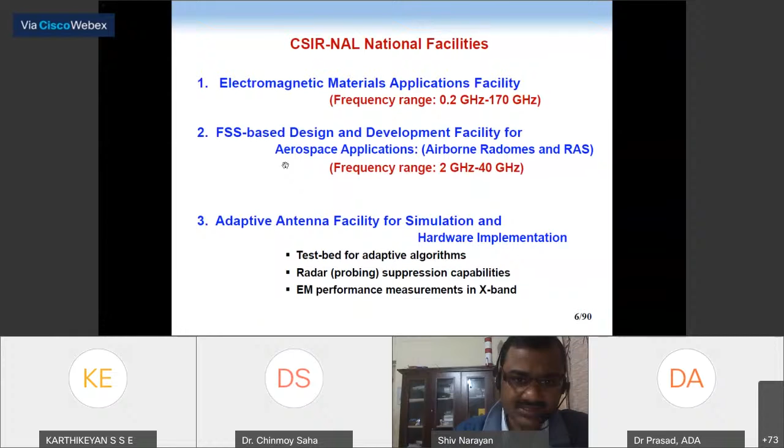Electromagnetic material application facility we have from 0.2 gigahertz to 170 gigahertz. FSS based design and development facility we have from 2 to 40 gigahertz, and adaptive antenna facility.

Till now we have developed several radomes, designed and developed at NAL for national requirements. For example, we have designed, developed and certified the Jaguar variable thickness radome. That TOT was transferred to HAL in 2008.

And certified radome, Saras nose cone radome, that was certified in 2000. This was developed for the NAL Saras aircraft. Multi-octave radome TOT was transferred to Indian Navy.

Apart from airborne radome, we developed several Doppler weather radomes. Like for ISRO, we have developed one close to 20-meter diameter. And also we have developed some ceramic radomes.

These are all our sponsors whom we support for design and development, like Boeing USA, DRDO, CAPS, ADA. These are our sponsors for whom we do the work.

Now we'll come to the topic of frequency selective surfaces. The origin of FSS started with periodic structures due to the great potential of military application. The oldest patent concerning periodic surfaces was issued in 1919 to Marconi and Franklin.

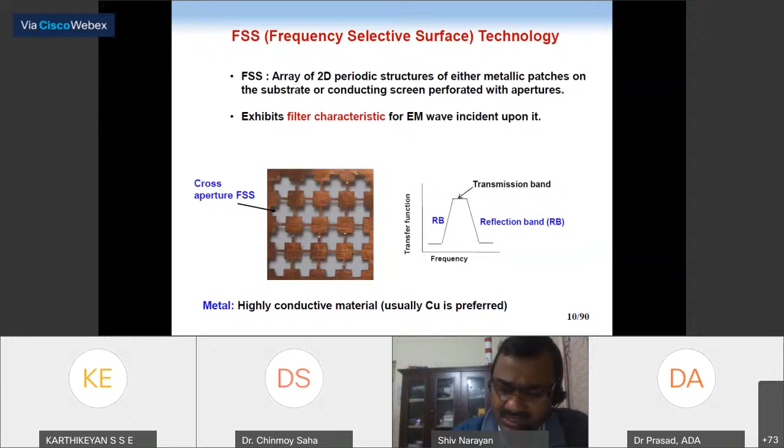In this case, we generally prefer copper for the metallic screen, because copper is easily available and its melting point is very high, so we can use it for aerospace applications. The types of FSS can be divided into two types based on element geometry.

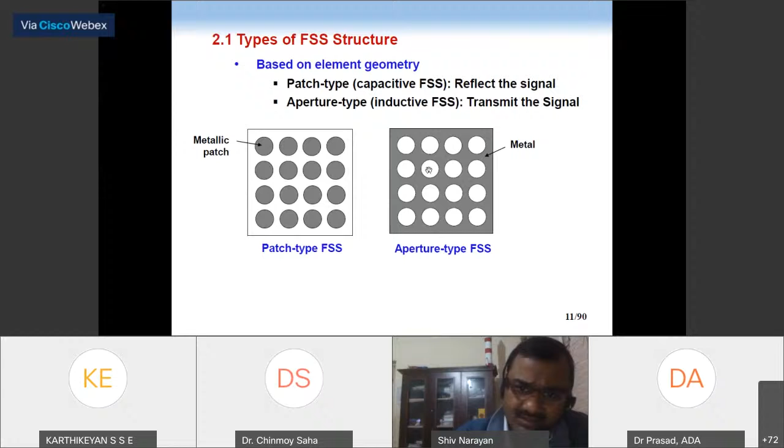There are two element geometry types: patch type, where the metallic patch is printed in 2 dimensions with periodic configuration, which basically reflects the signal whenever signal is incident upon it. The aperture type inductive FSS transmits the signal, allowing the wave to pass across it.

There are 4 kinds of FSS characteristics: low pass, which is a patch type FSS; high pass, which is square aperture kind; band stop, like patch type single square loop; and aperture type square loop showing band pass characteristics. So based on frequency characteristics, we can say there are 4 types of FSS structures.

Standard FSS structures available in the literature include the single square loop, which shows band reject characteristics at the design frequency, like 10 gigahertz. The double square loop structure is made up of 2 single square loops, so the inner one resonates at higher frequency and the outer one resonates at lower frequency. They combine and show band pass characteristics associated with two band reject filter characteristics at the design frequency.

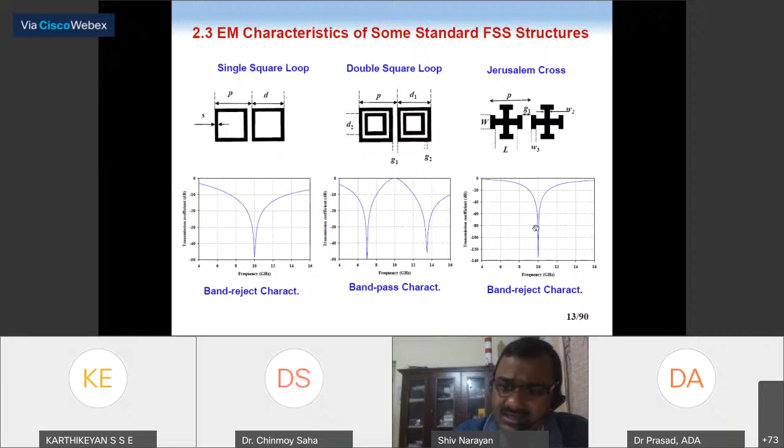We can design the FSS into three different configurations. First, a free standing FSS where there is no dielectric support, considered like suspended in the air. If you want to realize this, we have to make the support using foam, PU foam, and similar structures. Second, single layer FSS, where the FSS is backed by the dielectric, these structures are associated with the FSS structures on the other side.

And the cascaded FSS structure, this is made of more FSS layers separated by the dielectric spacer. Basically, this is used to enhance the bandwidth of the FSS structures. So these are all the design configurations of the FSS, how to design. This design depends on our requirement, whether we want high bandwidth or low bandwidth.

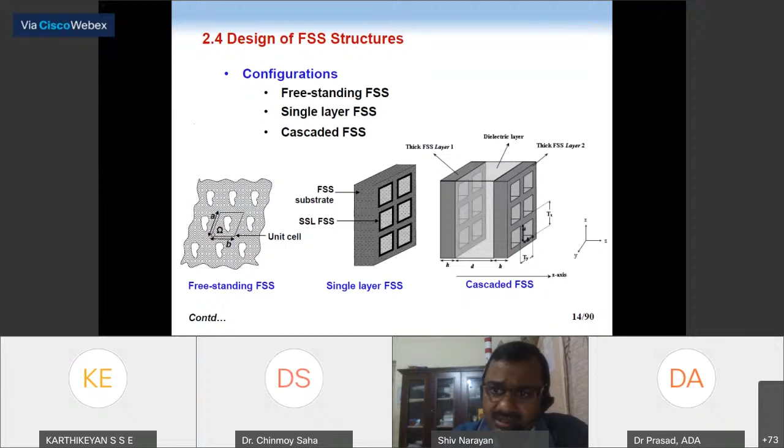It depends on that. So there are several methods for the design analysis of FSS structures. During the 1970s and 1980s, conventional methods were used like equivalent circuit model, transmission line, and transfer matrix method. These methods give very good insight into the physical problem, are easy to implement, and take less time to get the result. The only drawback is whenever we go for arbitrary kind of shapes, it is difficult to analyze with the equivalent circuit model, because it is difficult to produce the equivalent circuit model for arbitrary kind of structures.

To solve such kind of problem, the full wave method is more suitable because it can calculate the current distribution. So it is easy to calculate the field across arbitrary kind of shapes, and the only drawback is whenever we solve a large problem, it takes more memory and time. In that case, the approximate method is more suitable, like high frequency methods such as geometrical optics, physical optics, GTD and UTD. So these approximate methods we call high frequency methods.

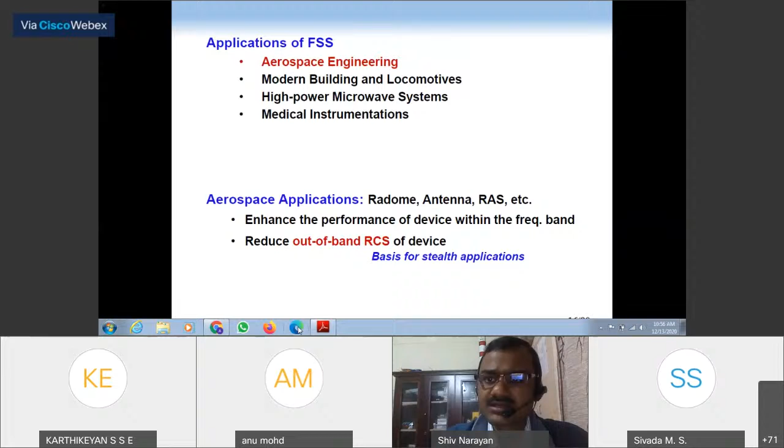So we were discussing aerospace applications. FSS has several applications in aerospace like radomes, antennas, and RAS. The main reason we use FSS for these applications is that it enhances the performance of the device within the frequency band and also reduces the out-of-band RCS of the device. That is the basis for the stealth application of FSS. Nowadays FSS is becoming more popular because of the stealth technology trend going on worldwide.

Now we'll go first to FSS for Radome. So basically, the Radome can be characterized...

Are you speaking in Telugu with Dr. Prasad? Yes sir, Krushna Kanth, sometimes Telugu sir, yes sir, we are talking. So where are you from, native place? I'm from Andhra sir, Kadapa. Oh Kadapa, wow, you have to be careful. No sir, nothing, we are very polite - stealth technology. Right, thank you sir.

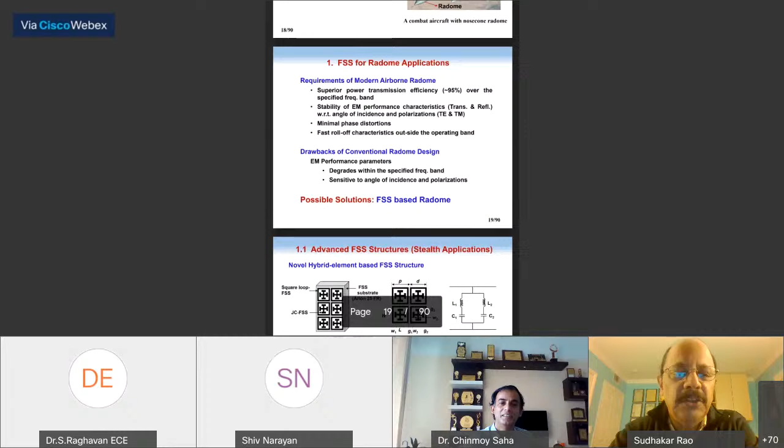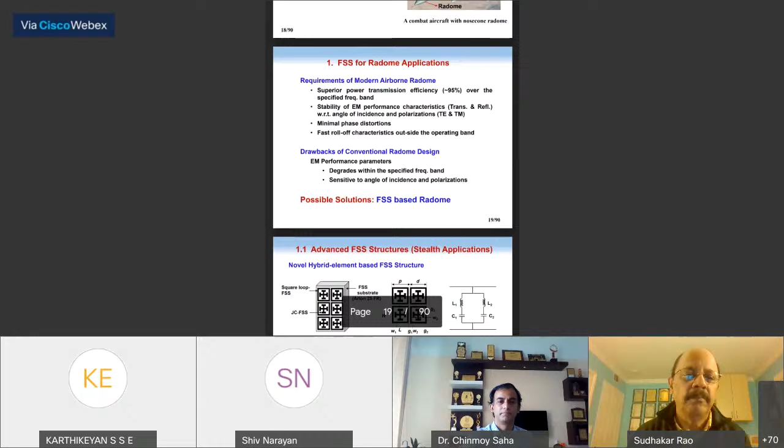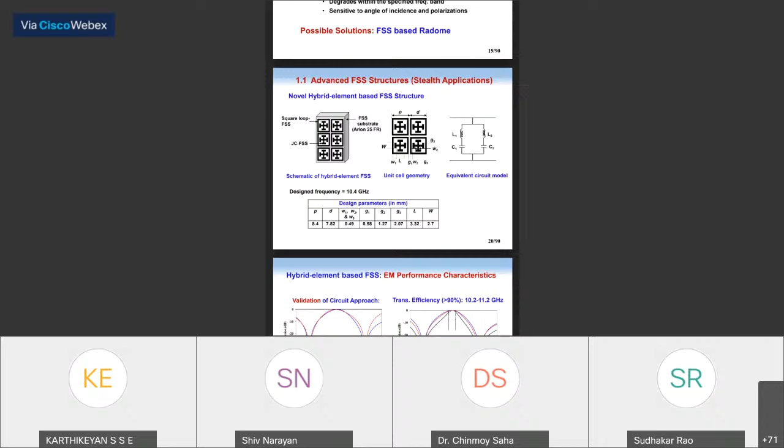The possible solution is the FSS based radome. Here I will give one example - advanced FSS. One structure uses a Jerusalem cross inside a single square loop. The single square loop resonates at low frequency and the Jerusalem cross resonates at high frequency. Both combined show the band pass characteristics shown here. We have plotted for 0, 30, and 60 degrees, and the frequency response is stable with respect to the angle of incidence.

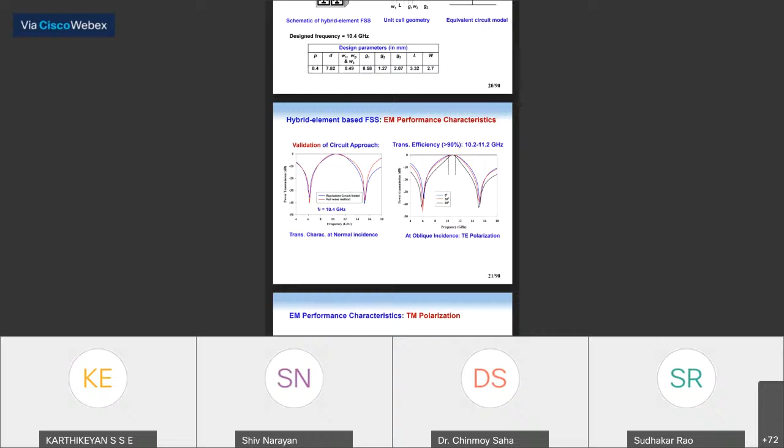So it shows more than 90% transmission from 10.2 to 11.2 gigahertz. So these structures we can use for radome application.

We have done for TM polarization also, if you can see. TM polarization also shows the stability.

Now we have used these FSS structures into the radome structures. We have embedded them into the monolithic radome exactly into the mid plane of the radome, so that we can get better impedance matching from both sides, and it will allow the signal through with minimum loss.

So we have designed the radome wall at 10 gigahertz. The thickness of the radome wall has come to 8.48 mm, and for dielectric properties we have used quartz, that is epsilon r 3.12, with loss of 0.011.

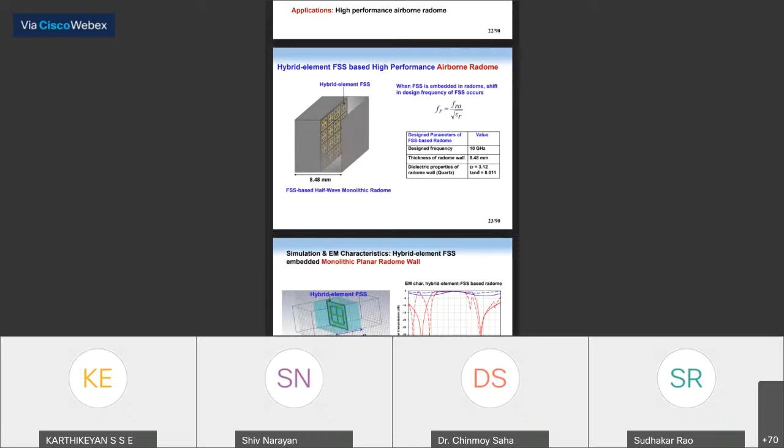So we have done the EM analysis for this. If you see here, on the right side, the red curve shows the FSS embedded radome, and it shows a flat band pass as well as sharp roll-off characteristic as we go outside the X band.

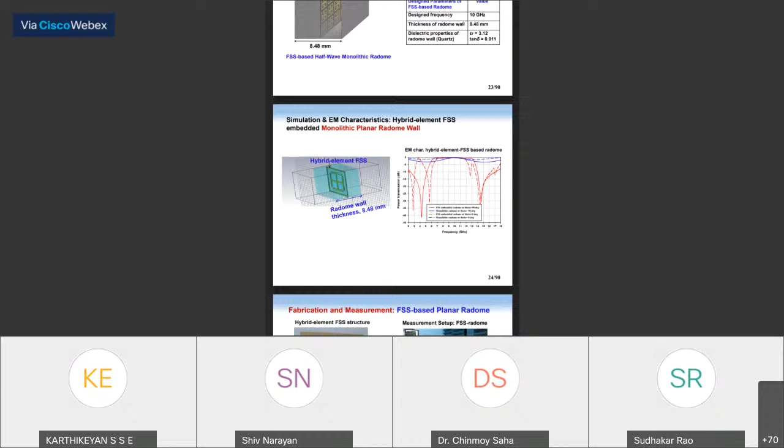But if you see the blue curve, that is the monolithic radome, and it shows good transmission at the design frequency, but outside the frequency band it degrades and there is no sharp roll-off characteristics. So this is the advantage of FSS over the monolithic radome.

Now for proof of the concept, we have fabricated this structure and measured it. So the measured result, shown at the bottom, the red curve is the measured result and the blue one is the actually simulated one.

Slight deviation has come because of the measurement error, and whatever radome wall we have fabricated, it is just a clamped multi-layered structure.

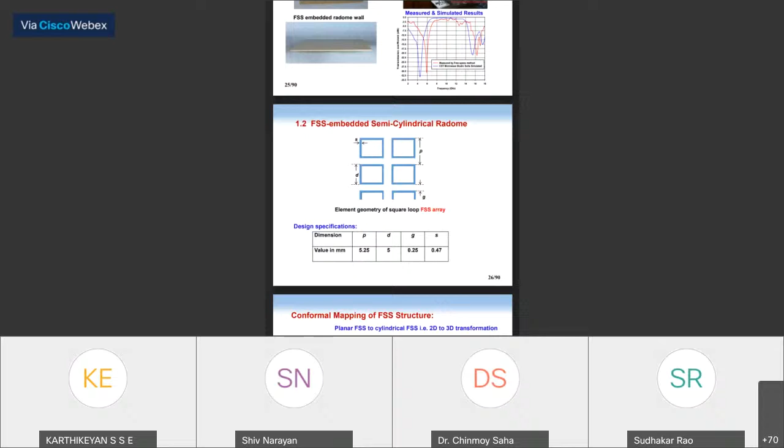Now we got some confidence in planar structures, then we have gone to the semi-cylindrical radome. So in this case, we have selected a single square loop, and whatever patch kind of structures we have just taken here.

So we have conformed the structures over the cylindrical surface. Then we have done mapping from planar to conformal, from rectangular coordinate system to cylindrical coordinate system. In that way, we have calculated whatever r and theta is required for cylindrical, as well as the length of the cylinder, that is equivalent to the height of the cylinder, equivalent to L.

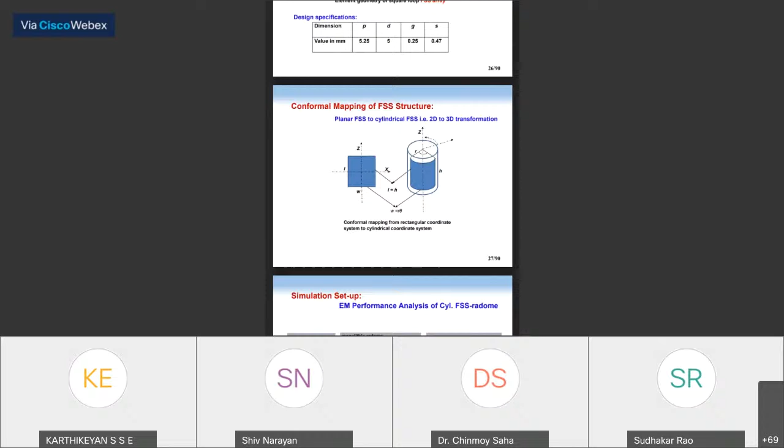So this structure we have simulated in CST and found out the E-plane pattern. On the right side, if you see the zoomed view, the blue one shows the FSS radome, and the red color shows the monolithic radome.

If you see here, with FSS embedded radome, we are able to enhance the performance from 0.17 dB loss to 0.10. So this is the advantage we want. And the same way we got for the H-plane pattern also, from 0.18 dB to 0.11 dB we got with FSS.

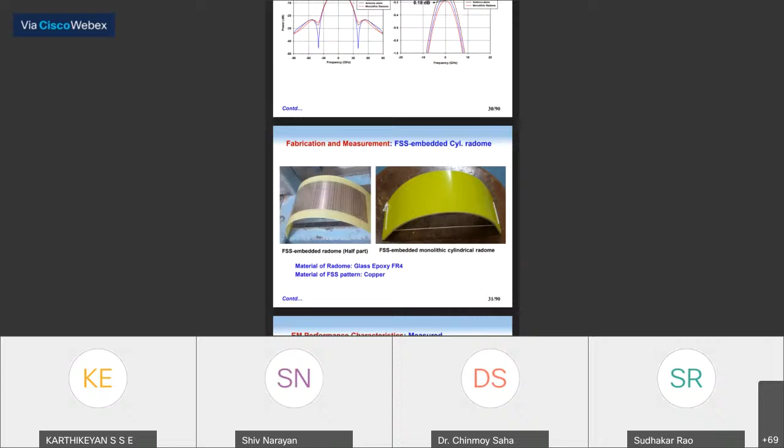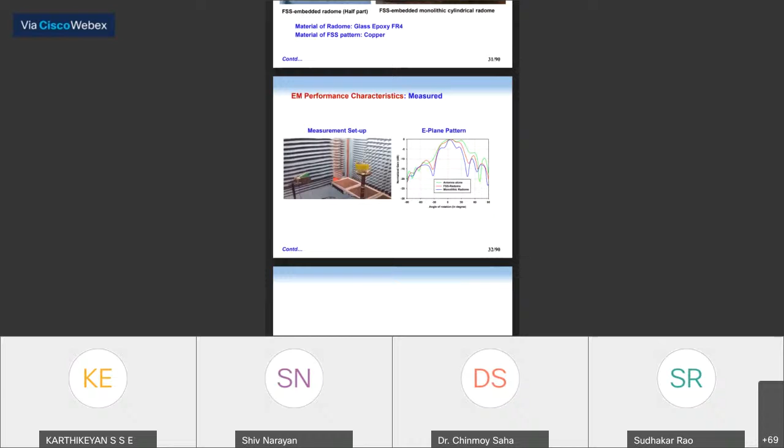As a proof of the concept, these FSS structures we have fabricated and measured. So in the measured result also, the green color shows the antenna alone, the red color is the FSS radome. The FSS radome here also gives better performance as compared to the monolithic radome.

Now we'll come to the actual development of the FSS radome, how to develop the radome for airborne application. So here we have given some steps.

First, we need to freeze the specification that is intended to be achieved during the project. This is the first step. Second step, while starting the work, first we need to select the candidate radome material, what material we are going to use for the FSS embedded radome. And last, we need to select the suitable FSS structures.

So for example, we have set here the specification, like we want actually 8 to 10% improvement in the transmission efficiency as compared to conventional monolithic radome, and we require improvement in bandwidth from monolithic conical radome of 300 megahertz to 500 megahertz. So this we have set as the target, and to achieve this target we have started working on that.

So first we have started with the planar FSS radome. For designing, we selected based on several analyses of several kinds of FSS structures. We have selected cross slot so that we can achieve whatever specification we have set. So cross slot we have taken into consideration, and we have embedded it in the mid wall of the monolithic radome.

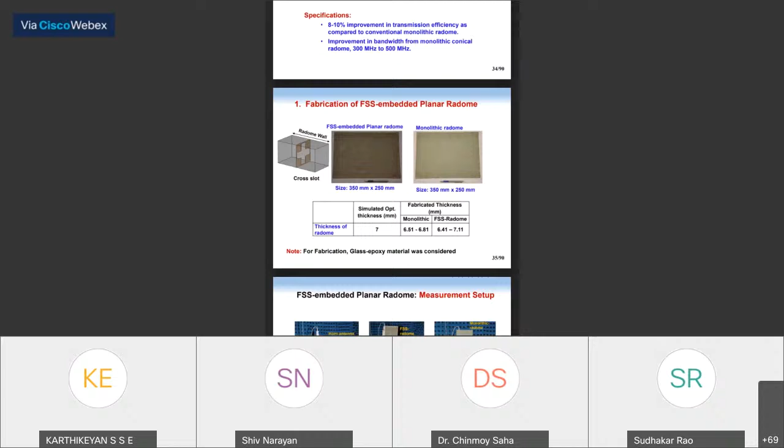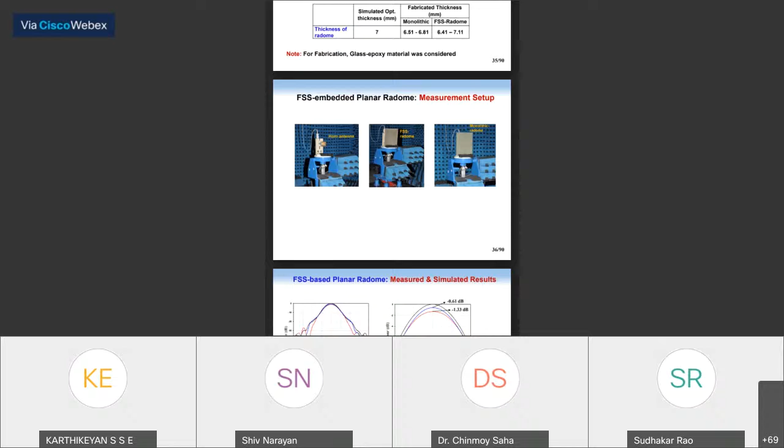We fabricated first the planar version and measured it in the anechoic chamber at our NAL, both FSS radome as well as monolithic radome. Then we compared the measured result as well as simulated result for the FSS based planar radome. On the left side, the black color shows the antenna alone measured pattern, along with monolithic and FSS. On the right, the zoomed version shows the blue one as FSS embedded and the red one as monolithic radome.

With FSS embedded, we could enhance the performance at design frequency from 1.33 dB loss to just 0.61 dB loss. So we got the advantage with FSS, and further we validated the FSS radome measured as well as simulated results for antenna alone and FSS radome, getting better agreement between measured and simulated.

Then we compared the simulated and measured results at 9 gigahertz. The simulated transmission loss was 0.96 for the monolithic radome, and the measured one we got minus 1.33 dB, which is slightly more in the measured case.

For power transmission loss in the FSS embedded radome, the simulated value was minus 0.58 dB loss and measured was 0.61. So we are getting close agreement between simulated and measured for the FSS radome case.

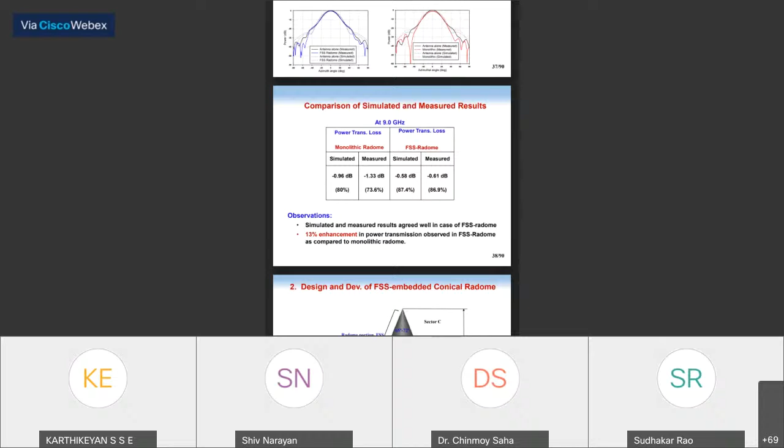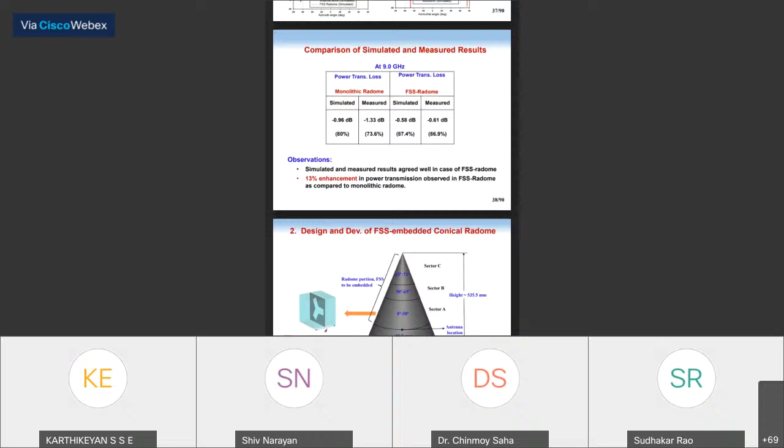In the planar case, we got 13% enhancement in power transmission in FSS as compared to the monolithic, where we had set the target close to 10%, since 10% was the target set for the conical radome. Once we got confidence in our configuration for the planar case, we moved to the actual airborne radome.

This is the conical shaped FSS embedded radome, the actual airborne radome. We selected the dimension of 535.5 mm, with diameter 337 by 68 mm.

With respect to the angle of incidence, since at the nose of the radome the angle of incidence is the highest at 72 degrees, we separated the structure into 3 to 4 sectors: 65 to 72 degrees, 50 to 65 degrees, and 0 to 50 degrees.

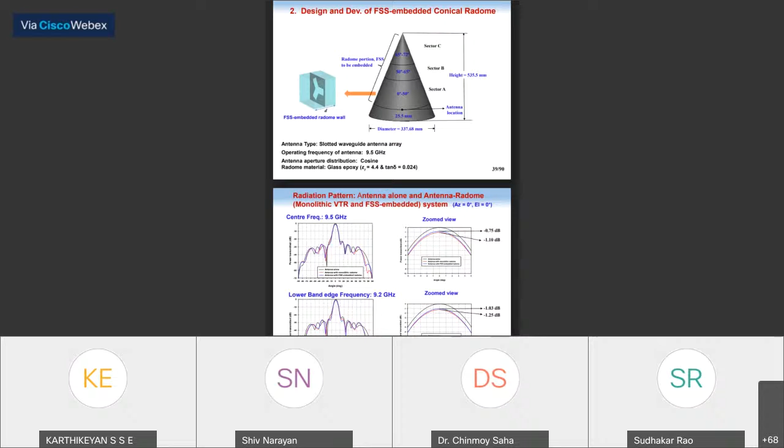The antenna is located at 25.5 mm from the base of the radome. We designed these FSS structures at 9.5 gigahertz, and for radome material we selected the same glass epoxy as before. So we first did the theoretical analysis.

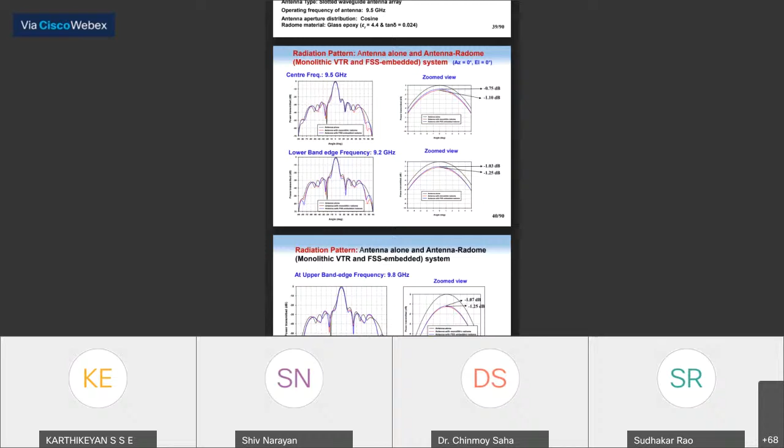In the theoretical analysis, we worked at center frequency 9.5 gigahertz and band edge frequencies 9.2 and 9.8 gigahertz. At 9.5 gigahertz, the blue color curve shows the FSS embedded radome, and the red one shows the monolithic radome. Compared to monolithic, with FSS we could enhance performance from minus 1.1 dB to minus 0.7 dB, and we got similar enhancement at the band edge frequencies of 9.2 and 9.8 gigahertz.

After the simulation, because the radome should not qualify only electromagnetically, it should also qualify with respect to environmental conditions as well as structurally for aerospace application, we conducted an environmental study on the FSS based planar laminate.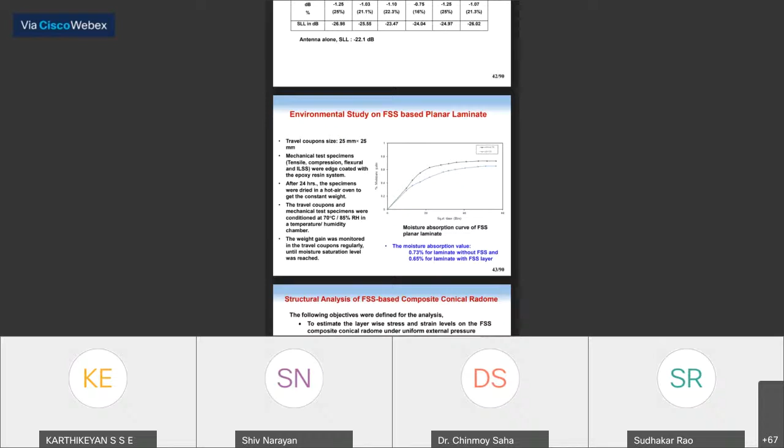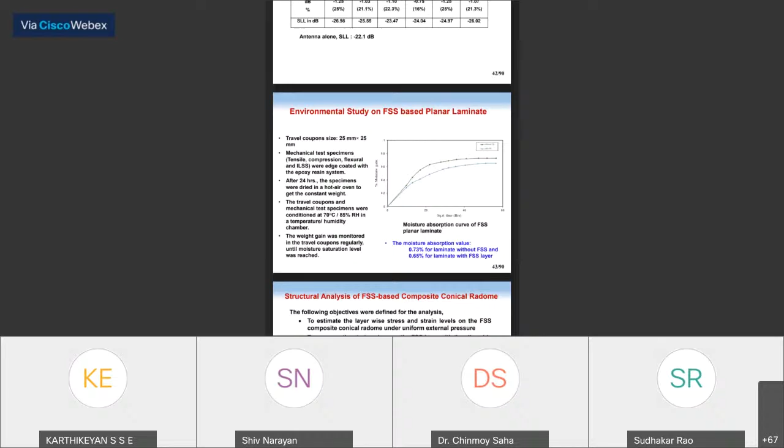We took a 25 by 25 mm travel coupon. The specimens were dried in a hot-air oven for 24 hours to get constant weight. Then the travel coupon and mechanical test specimens were conditioned at 70 degrees centigrade with 85% humidity in the temperature humidity chamber. We then compared the moisture absorption curve for the FSS planar laminate versus the monolithic. In the case of FSS, the moisture absorption was less, at 0.65%, compared to the monolithic which was more.

So in this case, FSS embedded structure is safe in terms of the environmental aspect. Now we have done the study on the structural way, how to estimate the layer-wise stress and strain level on FSS composite conical radome under uniform external pressure.

We also compare the strain value on the FSS layer with the allowable strain limit specified from the EM design, to find the buckling factor and buckling behavior, and to estimate the buckling factor of the radome for uniformly distributed external load.

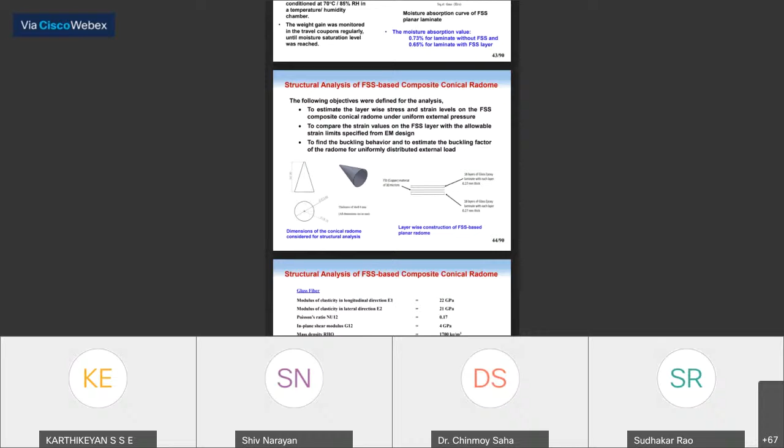For this, the radome wall is 7 mm, and we have taken 16 layers on top and 16 layers on the bottom, with the FSS layer being 30 micron, considered in the mid portion of the monolithic radome wall.

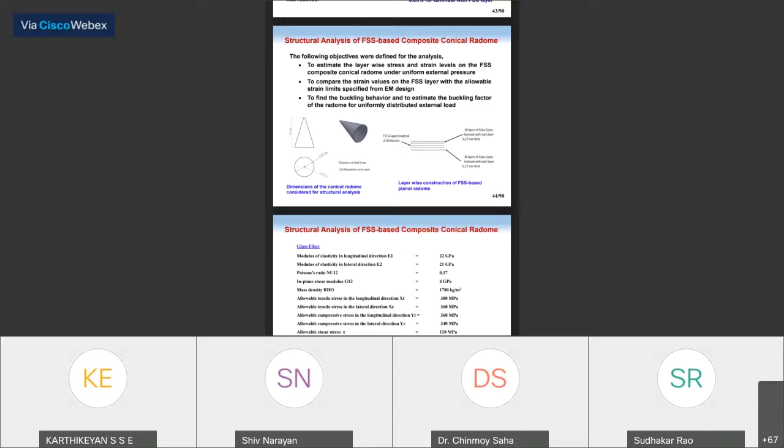We have done all the stress and strain analysis by considering all the glass fiber mechanical properties as well as copper mechanical properties. We used the Nastran solver available at our NAL for the finite element analysis.

We have done displacement plots, normal stress plot of layer 1 in the longitudinal direction, and normal strain plot of the 17th layer, which is the FSS, in the longitudinal direction of the fiber, meaning glass epoxy.

The maximum stress in the glass fiber we achieved is 4.1 MPa, while the allowable is 380 MPa. That is very, very high compared to what we are getting.

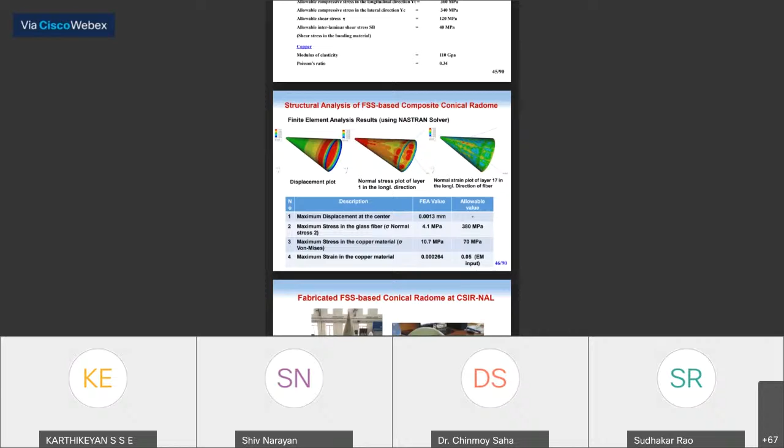And maximum stress in the copper material we got is 10.7 MPa as compared to 70 MPa that is allowable.

And maximum strain in the copper material we got is 0.000264, while allowable is 0.05. It is much higher. So with this structural analysis, whatever value the FSS embedded radome has, it is much less than what is allowable.

So in this case, the FSS embedded radome structure is safe in terms of aerospace application.

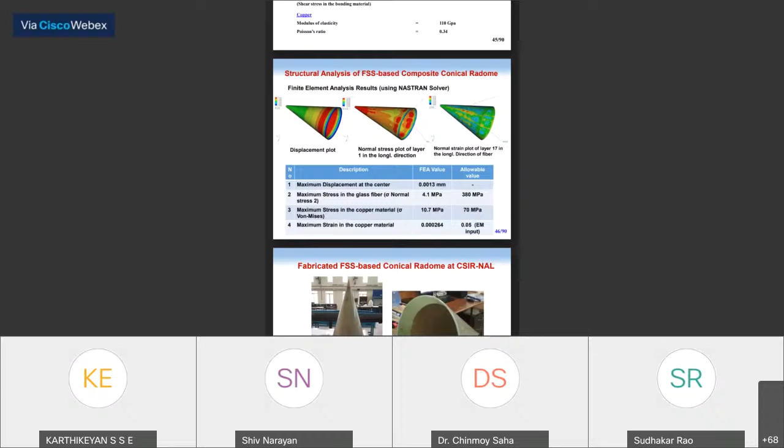When we got the confidence from electromagnetic, environmental, as well as structural analysis, we gave the freezed parameters to our fabrication group. The fabrication group has fabricated the FSS embedded monolithic radome at our NAL. So we have fabricated and measured it.

So if you see here, this table shows the monolithic simulated transmission loss. We are getting close to -1 dB from 9.4 to 9.7 gigahertz, so here we are getting close to 300 megahertz bandwidth.

If you see the FSS simulated as well as measured results, it shows from 9.2 to 9.8 gigahertz, where we are getting around 1 dB loss. The only difference is a slight deviation with respect to the resonance frequency, close to 100 megahertz.

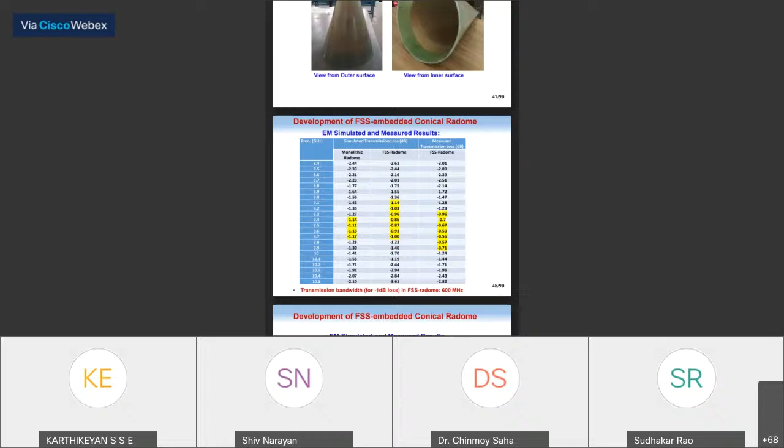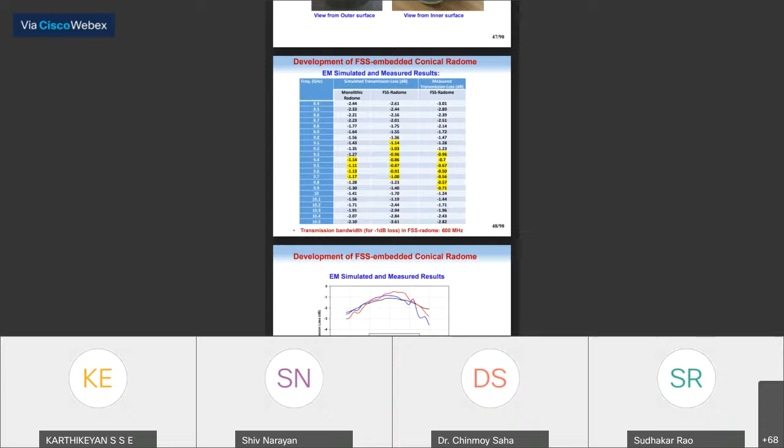The reason behind it is that this is the first time we have attempted this at our NAL, and also whatever FSS we have embedded had a slight deviation in the periodicity and the layers, so we got some deviation. But we got the transmission bandwidth with respect to -1 dB loss in FSS as 600 megahertz.

We can see in this graph, the red color shows the FSS embedded radome, and the black color shows the monolithic radome. So the FSS embedded radome enhances the performance at center frequency as well as the bandwidth.

So in this way we got 10 to 12% enhancement in transmission as well as bandwidth, which went from 300 megahertz to 500-600 megahertz. So we are very close to the specification we had targeted before starting the work. This is the procedure for how we design and develop the FSS radome.

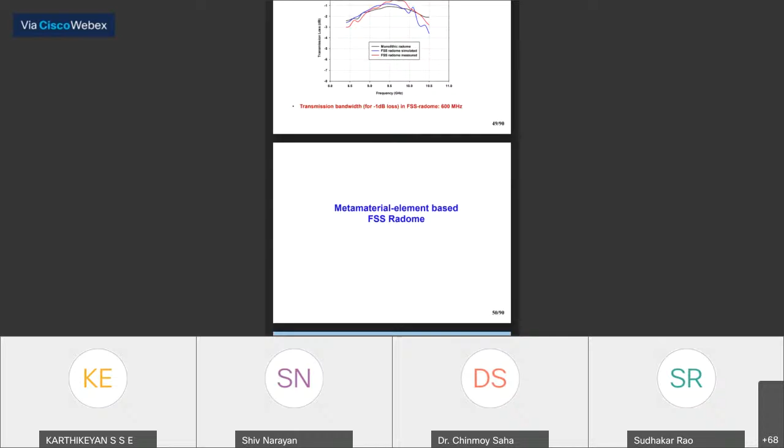Recently metamaterial structures have come into the picture, where this is getting used for high performance FSS radomes, because metamaterial structures can be used for millimeter wave applications, and with metamaterial we can easily achieve multi-band as well as broadband configuration.

So why is metamaterial element based FSS required? Because modern airborne radar systems require superior EM performance characteristics over a wide frequency band, and the radome should have stable characteristics with respect to angle as well as polarization, having broadband multiband characteristics for millimeter wave and microwave.

Since millimeter wave radar has also come into the picture, to work the FSS radome at millimeter wave, metamaterial structures are more preferred compared to conventional FSS, because conventional FSS shows more losses at millimeter wave and optical frequency regions.

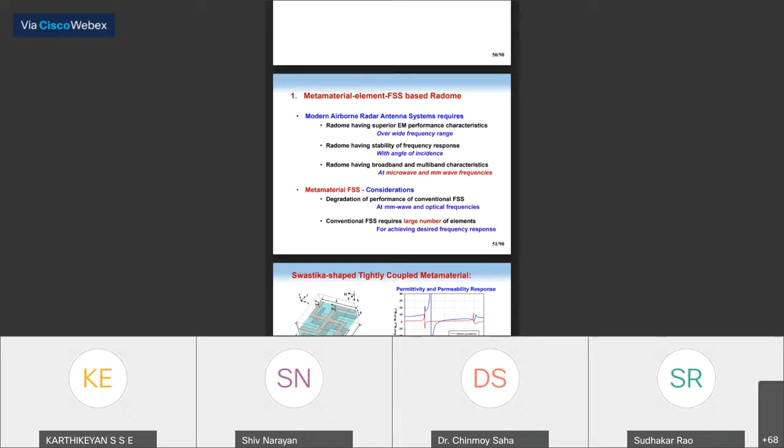So here we have introduced a new structure, a swastika shaped tightly coupled metamaterial structure. Two swastika shaped structures are superimposed, and both are opposite to the dielectric material.

And for these structures we have studied the permittivity and permeability. The permittivity shows behavior around 8 gigahertz and 16 gigahertz. Permittivity negative we got around 8 gigahertz, and permeability negative we got at 6 gigahertz and close to 16 gigahertz.

We can also understand this with the transmission curve. Whatever we are getting at 9 gigahertz is due to the electric resonance, and whatever resonance is coming at 5.2 is due to the magnetic resonance, and 13.6 we are getting due to the magnetic resonance.

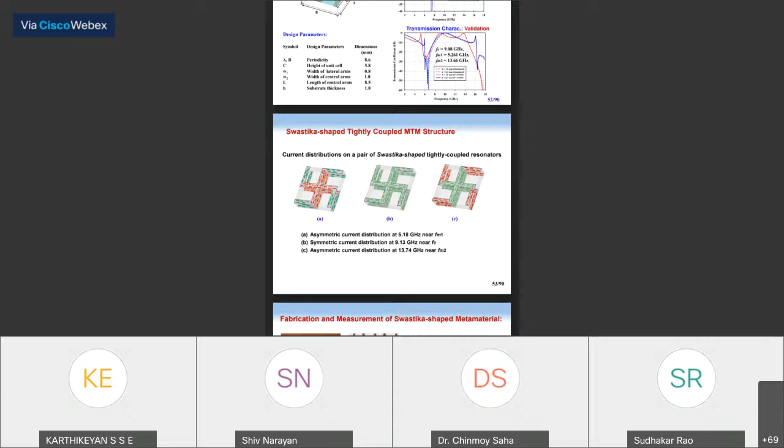We can understand in a better way the electric resonance and magnetic resonance at M1 and M2, whatever is happening with the current distribution. The magnetic resonance occurs due to the asymmetric current distribution at 5.18 into the lateral arm of the structure, and symmetric current distribution at 9.13, that is the electric resonance occurs due to the symmetric current distribution, shown in figure B.

And the resonance at 13.74 gigahertz is happening due to the asymmetric current at the lateral arm, whatever S arm is there shown in red color, because of that the current is there.

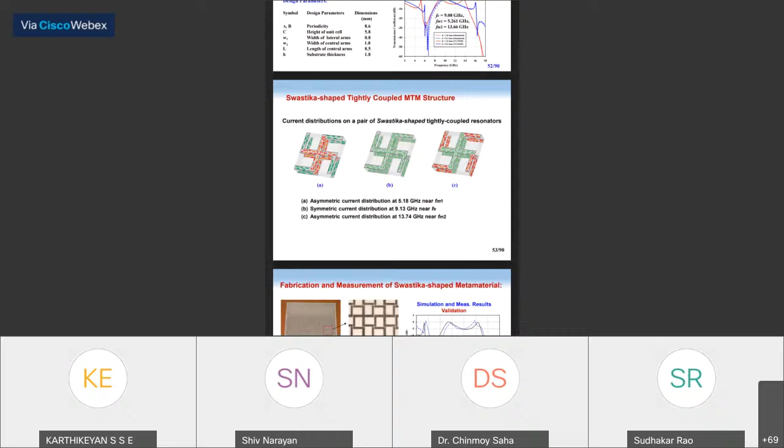For proof of the concept, we have fabricated the structures at our NAL, and then we have measured. So we are getting a good match between simulated and measured results, very close to that.

To achieve the radome characteristics, to make this structure suitable for radome application, we need band pass and sharp roll-off characteristics. We added one shorting pin, one shorting strip at the edges of the swastika shape. In this case, looking at the permittivity and permeability response, the first magnetic resonance disappeared. We now have only one resonance due to the magnetic current, and one due to the electric resonance at 7 gigahertz. So between 7 and 11 gigahertz, we have the non-resonance frequency region.

That is very much suitable for band pass characteristics. We have studied this structure up to 60 degrees with both TE and TM polarization. The structure shows a very stable response up to 60 degrees, and also shows bandwidth from 9.5 to 10.8 gigahertz with respect to 0.5 dB loss, so we are getting more than 1 gigahertz bandwidth at that loss level.

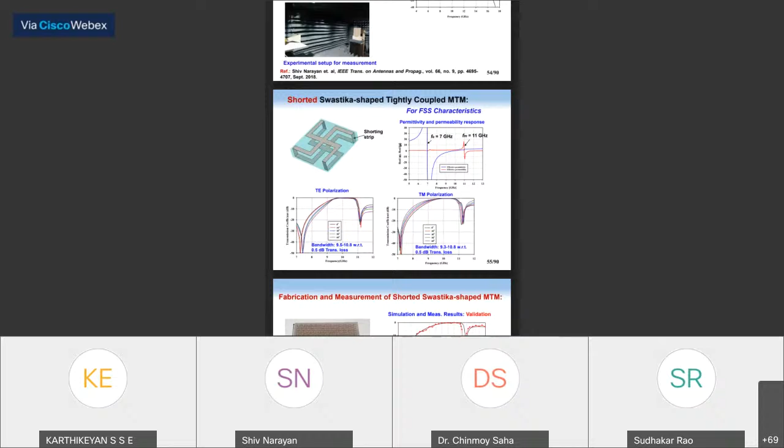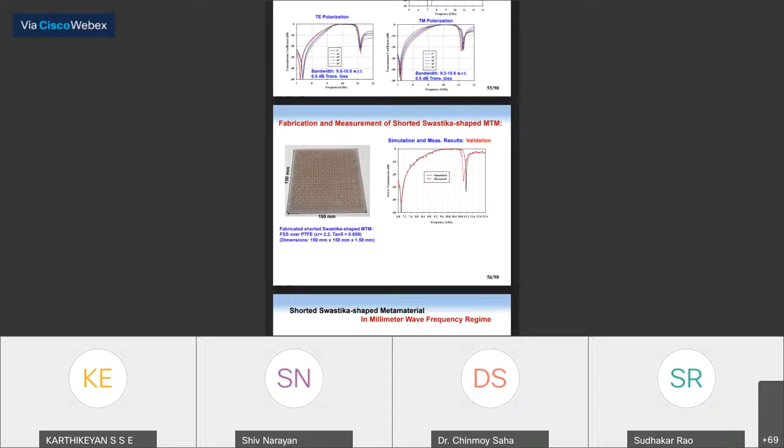Also for proof of the concept, we have fabricated these structures in our lab, and we got very good agreement between the measured and simulated results.

Further we have studied these structures because metamaterial is known to work at millimeter wave also. The same structures we have optimized and designed for millimeter wave, from 50 gigahertz to 75 gigahertz, and we got 5 gigahertz bandwidth around 64 gigahertz. So in this way, this structure is working.

The structure is also working at the millimeter wave frequency region.

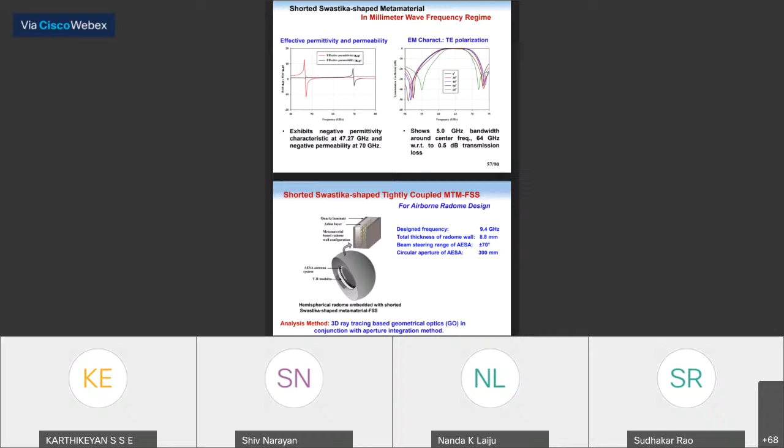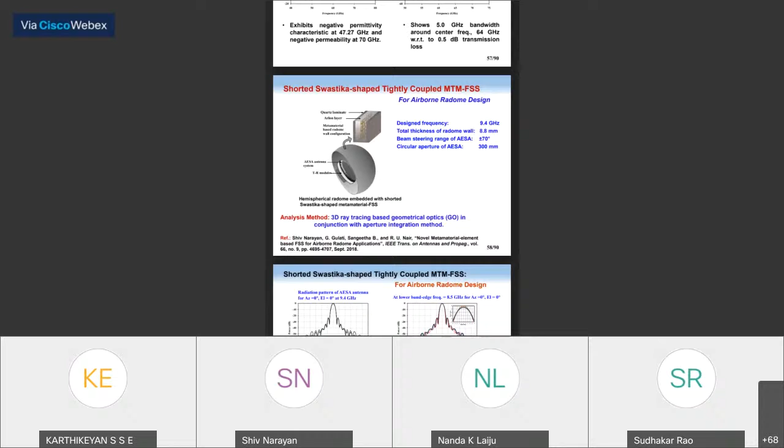Now we'll come to the shorted swastika shaped tightly coupled metamaterial structures. We have embedded the same structures into the radome wall. After embedding, we have done the simulation with respect to 3D ray tracing based geometrical optics in conjunction with the aperture integration method. This is the radiation characteristic of the AESA antenna.

Looking at the right side curve, with FSS embedded we got just 0.125 dB loss, while monolithic is 0.4 dB, and 0.254 dB is FSS without shorting. So with shorting, we are getting better performance compared to without shorting.

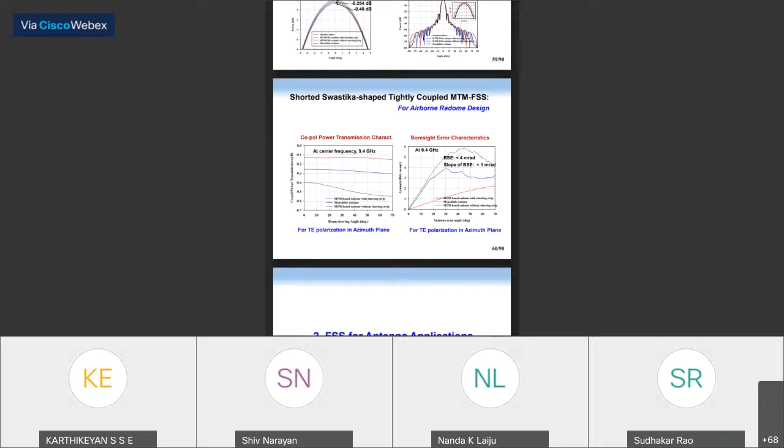But the boresight error is enhanced for the metamaterial without shorting, shown in green color, going more than 4 to 5 milliradians, while the blue curve stays below 4 milliradians. So the metamaterial structure with the shorting strip gives better performance compared to the other.

This is overall about the Radome application. Now the second application will move to FSS for antenna application, how the FSS structures are very useful for antennas also.

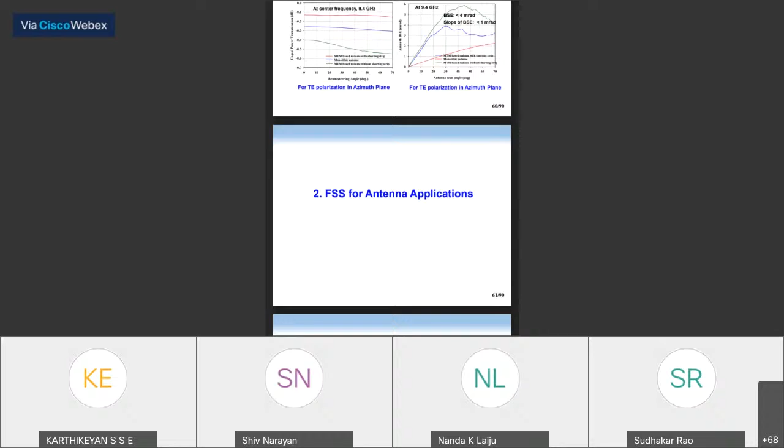Basically, the FSS structures: whatever stealth is there, like a low observable platform requires low RCS antenna with high gain and directivity, and compact and wide bandwidth antenna. This is the requirement for stealth applications. The possible solution is FSS and metamaterial based antenna designed using FSS based high impedance ground plane.

Due to its band reject characteristic, it is used, and also the FSS structure is used as a superstrate due to its band pass nature. So here we took one example of FSS as a superstrate, using a band pass kind of FSS, because the structure shows the band pass characteristic around 9.5 gigahertz. So at 9.5 gigahertz the FSS shows band pass characteristic.

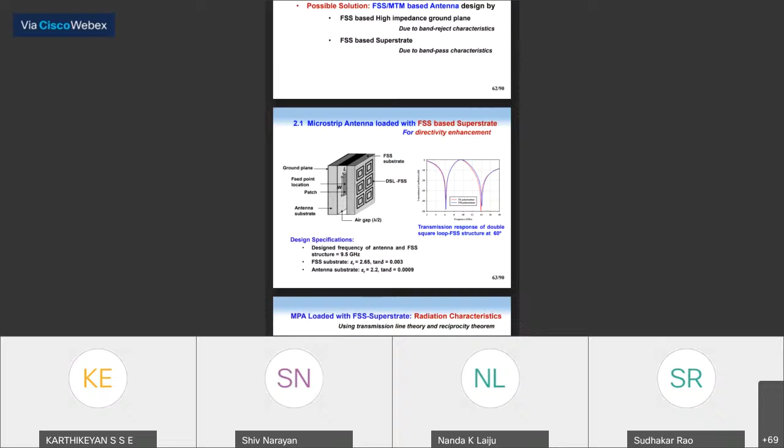At the same frequency we have designed the microstrip antenna also. So at this frequency the structure shows the band pass characteristic, and because the FSS structure collimates the beam, it enhances the performance like directivity.

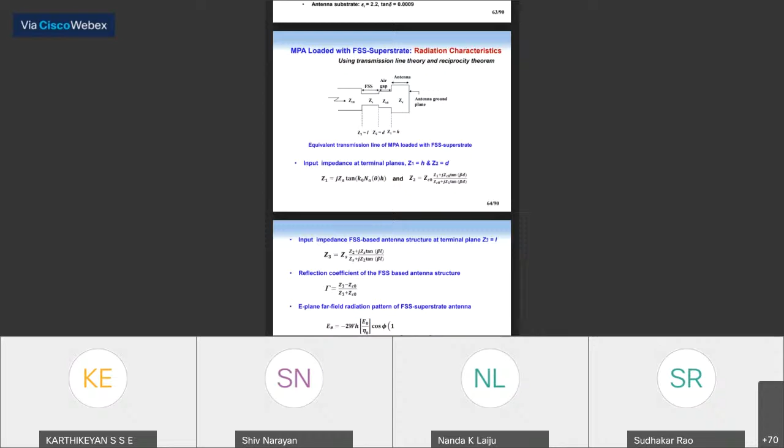So we have done the analysis using transmission line theory and reciprocity theorem. In this case the antenna ground plane is considered as a short. So in this way we have found out the impedance as well as reflection coefficient of the FSS antenna aperture structure. Then from reflection we find out the E plane radiation pattern of the FSS superstrate antenna. So here we have done the validation, and this is the microstrip patch antenna loaded with FSS superstrate.

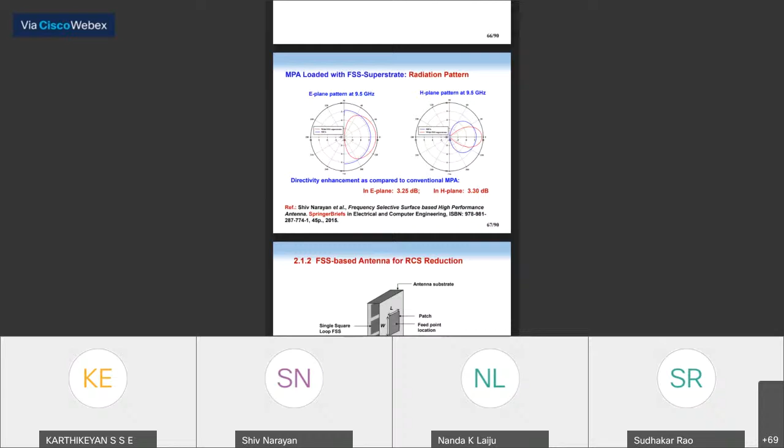This is the radiation characteristics. If you see the red curve, that is the E plane pattern of the antenna we considered. So in the E plane we got 3.25 dB and in the H plane we got 3.3 dB directivity. So we are getting enhancement in directivity with the FSS based superstrate.

Now the second example we have taken is how the FSS is useful when using the FSS in the ground plane toward RCS reduction. So here we took one example like a single microstrip antenna, and in the ground plane of the antenna we have used a single square loop FSS.

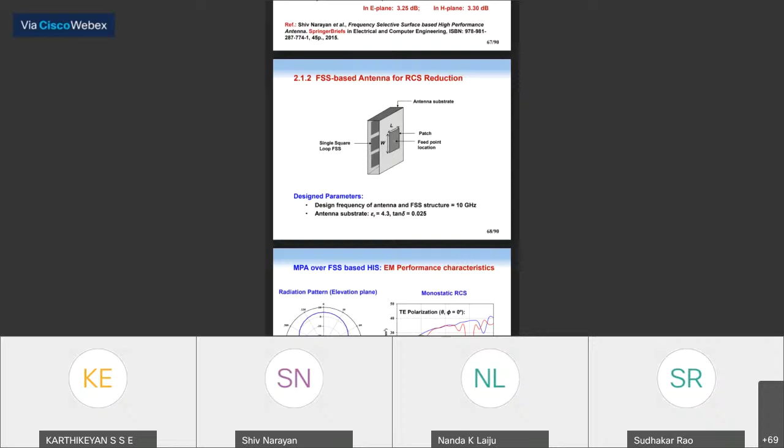If you see here, there is no much variation in the radiation characteristic. If you see on the right side, the monostatic RCS of the FSS based ground plane antenna, beyond 15 gigahertz we are getting very low RCS as compared to the antenna without FSS.

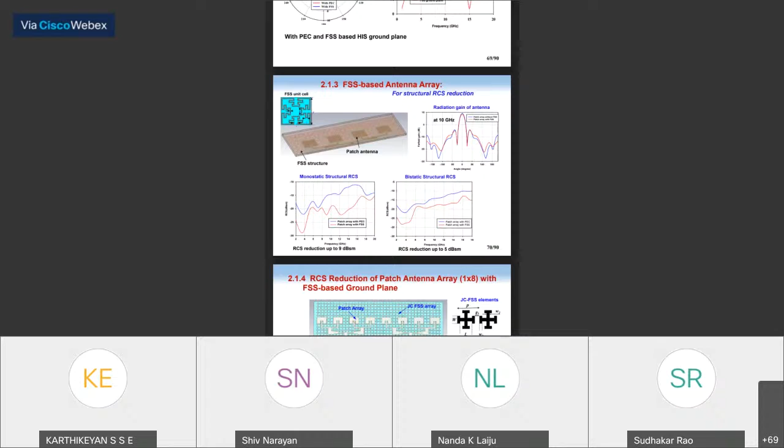So we got monostatic RCS reduction up to 9 dB sm over the frequency from 2 to 20 gigahertz, and also we got bistatic RCS reduction up to 5 dB sm over 2 to 18 gigahertz.

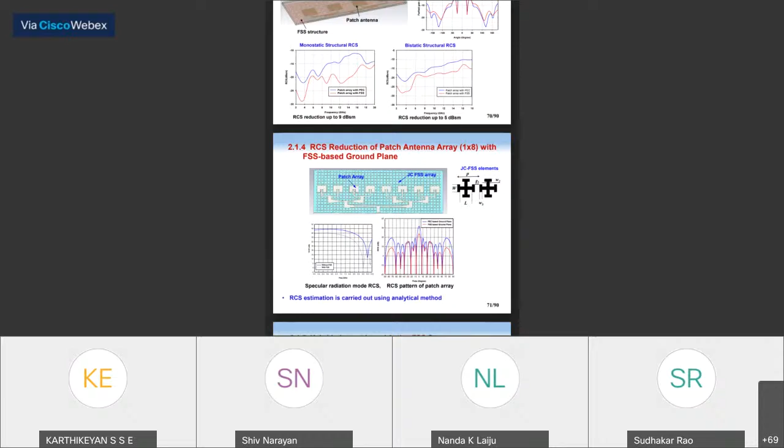And further, the RCS reduction of the patch antenna array with FSS ground plane: here we have done the active RCS calculation. In this case, specular radiation mode RCS, whatever it is there, means this was the structure RCS, and radiation mode RCS we also computed with the same structure. So here the blue curve is the PEC based ground plane, and the red curve on the right side is the FSS based ground plane. So we are getting the radiation mode RCS also reduced by embedding the FSS.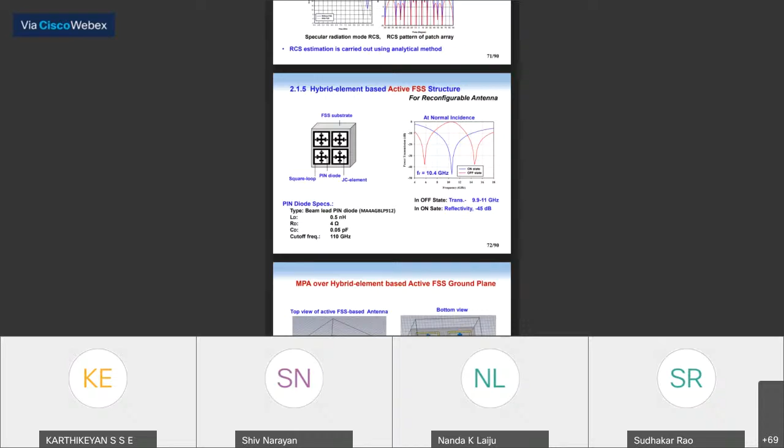Whenever the diode is on, the Jerusalem cross will be shorted with the single square loop, and the full structure will behave like a single structure. So in this case, the blue curve is like a full reflection kind of structure. And the second one, if you switch off the diode, the FSS's outer single square loop and Jerusalem cross will resonate at different frequencies, and combined they will show band pass at 10.4 gigahertz.

So in this case, by switching the diode on and off: if you switch on the diode, it will reflect the signal back. If you switch off the diode, it will allow the signal to pass through it.

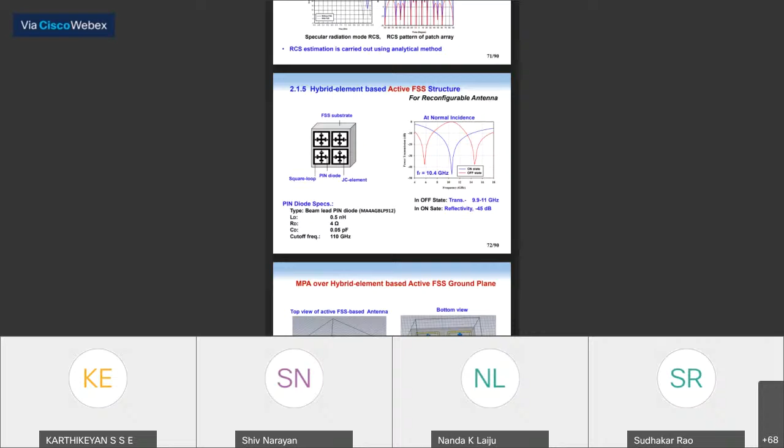Now we have simulated this structure. If you see the result, the return loss is slightly degraded, but it is still minus 20 dB, which is better. The radiation characteristic is also similar, there is no difference in that.

If you see the RCS estimation of the structural RCS of the FSS based microstrip patch antenna, whenever we switch off the diode, it allows the signal to pass across the antenna and will not allow the antenna to radiate, but it will reduce the RCS close to 23 dBsm at the operating frequency band. So this is the advantage. Whenever the diode is on, the antenna will work like a normal antenna, because the FSS will reflect all the signal and work like a ground plane to the antenna.

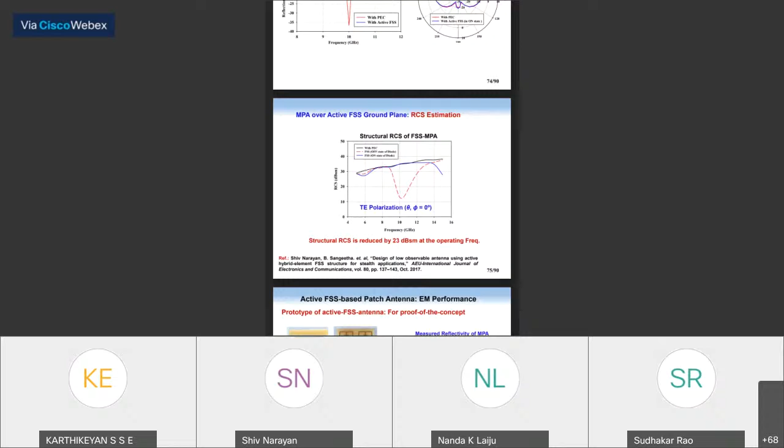For proof of concept, we fabricated a similar structure and got measured results similar to whatever we proposed. Some challenges are there whenever we are using the FSS based antenna. The main one is that the FSS based HIS based antenna faces a weight penalty due to the requirement of dielectric support in the design of FSS based HIS.

Also, if the FSS superstrate is very close to the antenna, there will be mutual coupling between the antenna array and the FSS. So we have to do the calculation and spacing between the antenna array and the FSS properly, so that mutual coupling is minimum. It is also challenging to estimate the mutual coupling between antenna array and FSS array. Moreover, RCS estimation for finite based FSS array becomes more computationally intensive. Some of this is given in our paper.

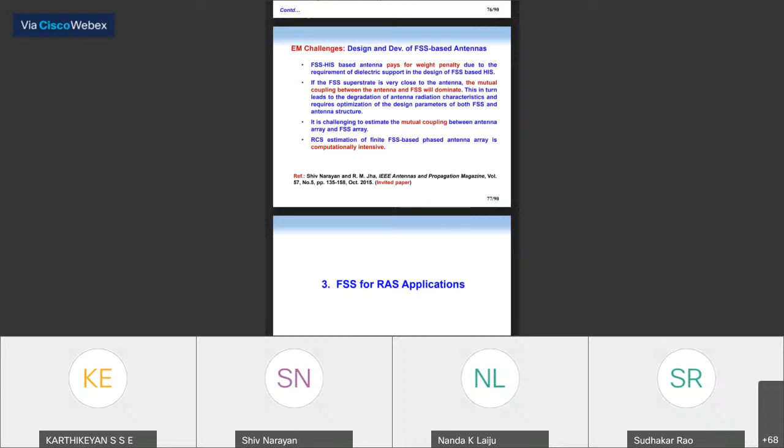The last application is frequency selective surfaces for radar absorbing structures. FSS is very useful for radome application as well as antenna application, and also for radar absorbing structures. The requirement of FSS based radar absorbing structures arises because thin conventional RAS generally exhibits narrow band absorption. The broadband conventional RAS, example Jaumann and Dallenbach, are usually thick and bulky if designed that way. Ferrite based absorbers are quite heavy in weight.

So the necessity of thin and broadband absorbers in the modern aerospace industry, including stealth platforms, is essential. The possible solution is to design such thin and broadband absorbers using frequency selective surface and metamaterial based RAS, which is usually thin and lightweight. That's why we are using the FSS. Here we have given a typical FSS based radar observing structure.

So how to design: there will be a ground plane and a spacer, and on top of the dielectric we print the resistive kind of FSS in such a way that whenever a wave is incident upon it, it shows impedance matching with the free space wave, allowing the signal to pass inside. Once the signal passes inside and comes back, it will see impedance mismatching, and finally the wave will go back and forth between the dielectric and the ground plane as the FSS, and finally it will be absorbed.

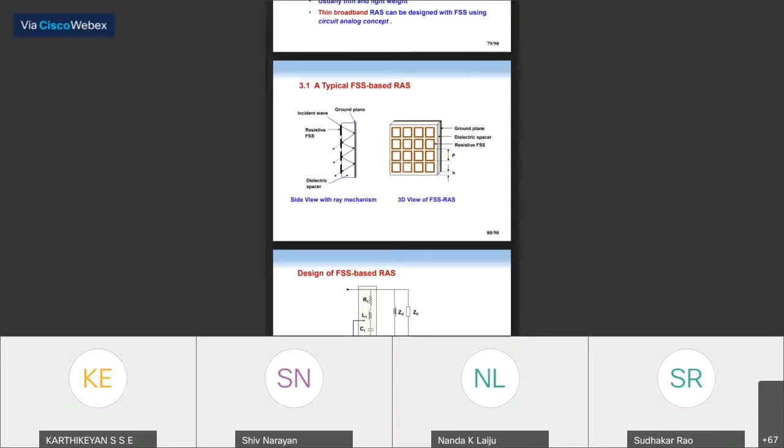So this is another example, a 3D view of the FSS RAS where a single square loop is taken.

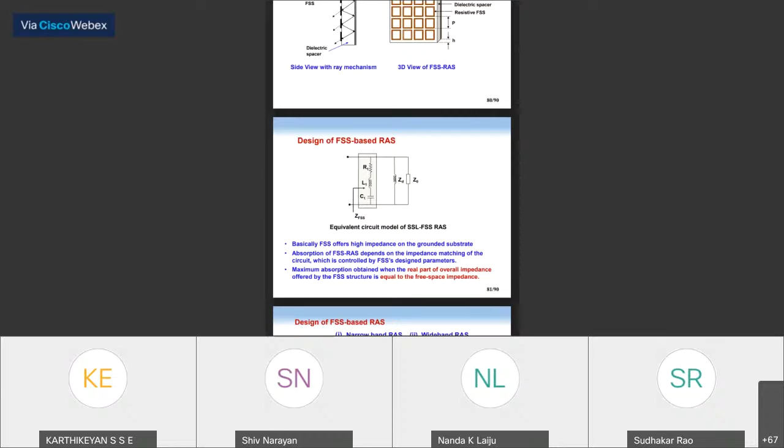In terms of the equivalent circuit model of the frequency selective surface, the equivalent circuit has resistance due to ohmic losses because of the resistive nature, inductance and capacitance. So we make R1, L1, C1 in such a way that the impedance of the FSS is equivalent to the free space impedance. In that case, it will allow the signal to pass across it and absorb the maximum signal.

So using FSS, we can design two types of radar absorbing structures: narrow band as well as wide band. The narrow band is only associated with the structural resonance of the FSS structure, so this is not very difficult. We can simply design it the way we want. Actually, this is the theme.

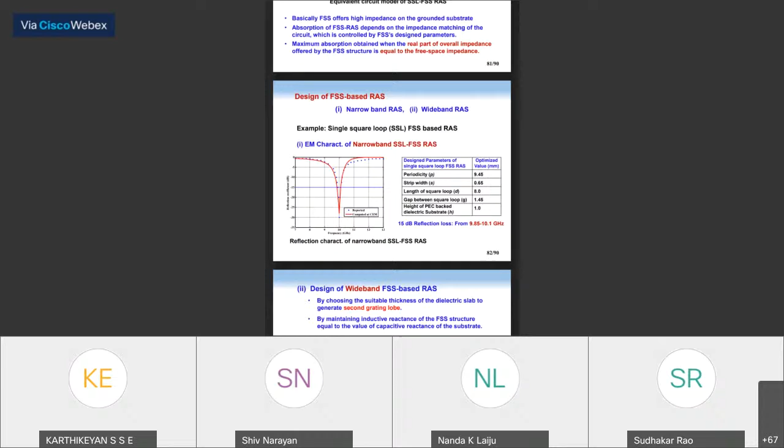But whenever we go for wide band radar absorbing structures, in this case we choose the suitable thickness of the dielectric slab to generate the second grating lobe. The thickness needs to be selected such that we dominate the higher order harmonics. In that case, we get one more resonance at the higher order frequency region, giving us broadband.

So to achieve this, if the inductive reactance of the FSS structure equals the capacitive reactance, then the second grating lobe will generate and we will get the broadband.

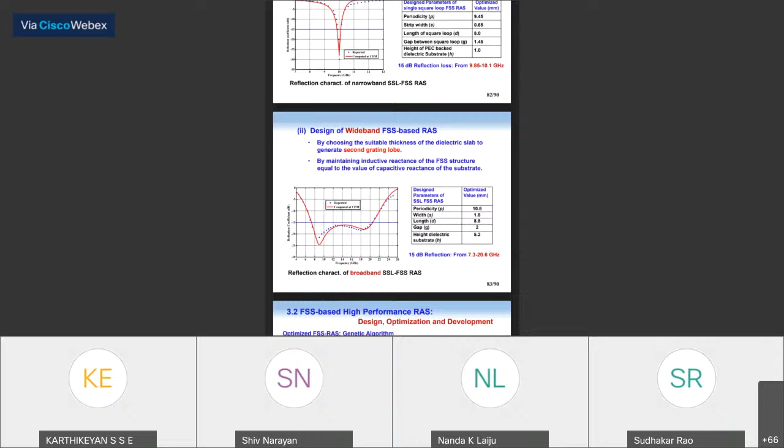For proof of concept, we designed the prototype, fabricated it, and tested it. We got a similar pattern as expected.

Now, development and EM characterization of the radar absorbing structures. In the same way, there are radar absorbing material properties like carbon black, carbon nanotube, graphene-based RAM, and simple ferrite RAM. These are all materials we have developed at CSIR NAL to achieve absorption from 2 to 18 gigahertz.

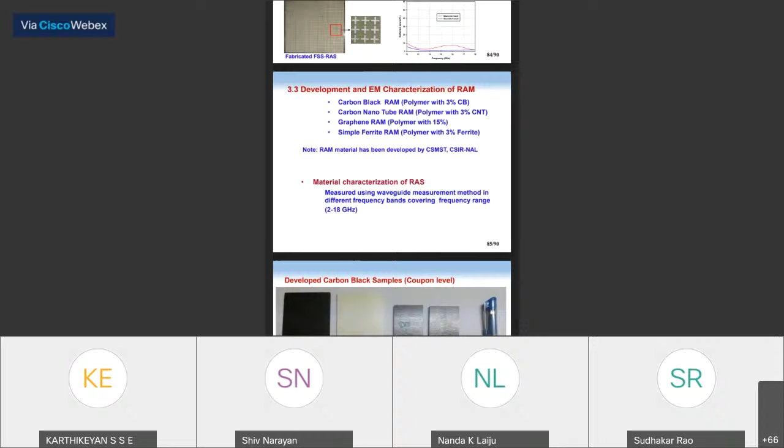In this case, this sample we fabricated at our NAL and tested at different bands of frequency. Here, what I want to show is how the FSS structures can be used to enhance the performance of radar absorbing material.

We took one example of a carbon black polymer radar absorbing structure. We printed a single square loop FSS over it and did analysis. The blue curve is the radar absorbing material, carbon black with 3% carbon black content. Here we got 3.3 gigahertz bandwidth with respect to minus 10 dB.

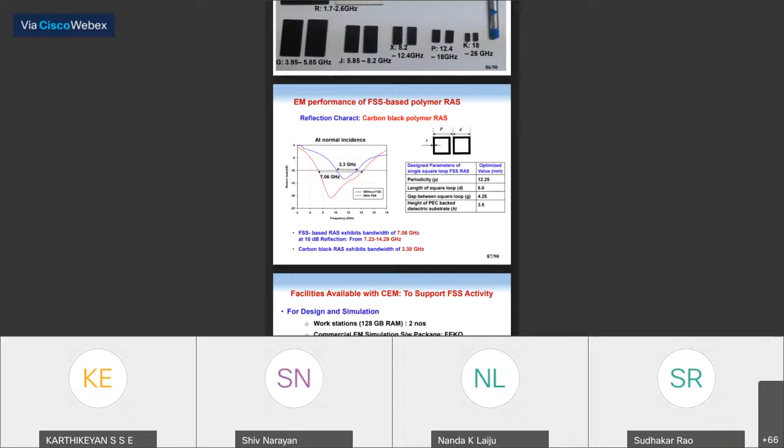But whenever we printed the FSS, we could enhance the performance from 3.3 to 7 gigahertz. So this is the advantage. What the FSS did here was improve the impedance matching with free space, and that's why we got better performance.

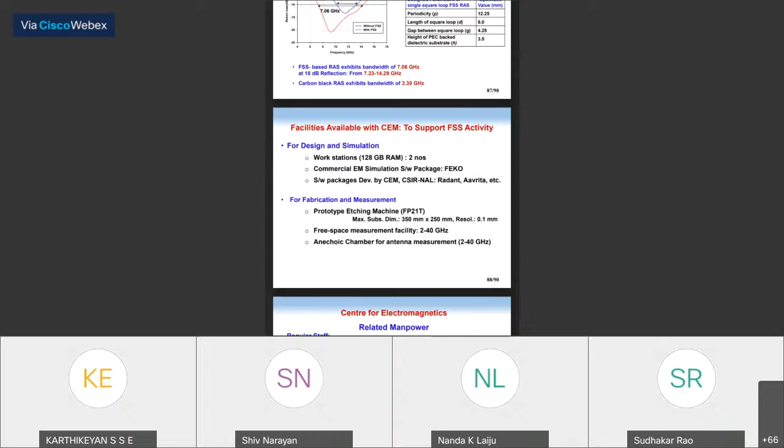So this is overall the talk I have with me. Now we have some facilities to support the FSS activity. We have workstations and commercial software packages. We have FEKO, and now we are going to purchase HFSS also. Software packages we have developed at CSIR include Radant Code and Aavrita. For fabrication, we have a prototype etching machine, free space measurement facility, and anechoic chamber.

These are all the manpower who support the EM and FSS activities going on at our NAL. These are my team who work with me, along with us.

And this is overall my presentation. Thank you to all the audience who listened patiently to my talk. Thank you once again.

Thank you, sir, for such a wonderful, informative talk. You have put everything from theory to practice, sir. We are very happy and proud to have a speaker like you.

And your lab is having strength, and the work you associate with DRDO, ISRO, and other agencies, along with reputed industries, will help us towards indigenization of defense applications. We are trying to indigenize many technologies, sir. There are a couple of questions from the audience. Can you speak loudly, sir? In mobile it is difficult to hear. I also hear a very feeble voice. Please increase your voice, it will be good for me. Sir, can you hear me? Yeah, now it is fine. Still not loud enough. Increase your system volume.